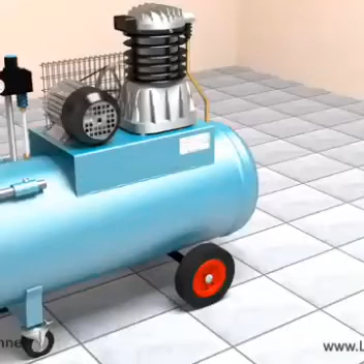This air compressor consists of an electric motor that compresses air into a storage tank. The compressed air can be released at chosen pressure when required. How does an air compressor work, and what are the criteria for selecting a proper air compressor?

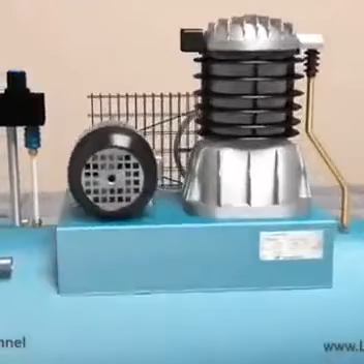Well, there exists a variety of different compressor types. Let's continue with an overview. Normally, the compressors used in the field of automation and workshops are the so-called positive displacement compressors. Here, pressure is achieved when air is drawn into a chamber and the volume of this chamber is reduced. In this video, we want to confine ourselves to this type of compressor.

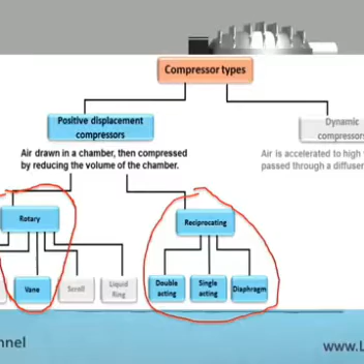Let's have a closer look at the reciprocating compressor. As the crankshaft turns, a piston reciprocates within the cylindrical housing. The inlet valve, also called suction valve, allows atmospheric air to enter the cylinder. This is done during a suction stroke of the cylinder. The outlet or discharge valve opens at high pressure during the compression stroke.

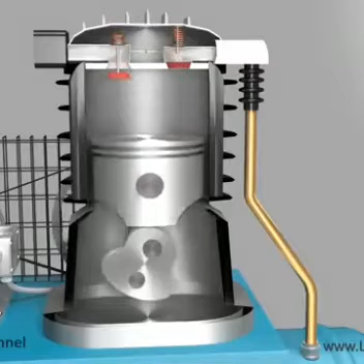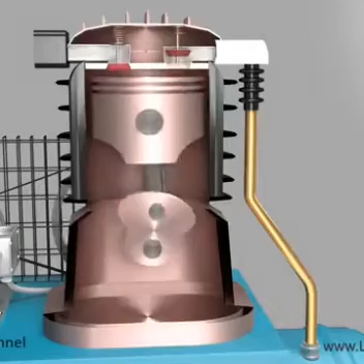Air heats up when it is compressed. This is a problem of each compressor. The result is not only a less efficient compression cycle, but also a real danger of explosion if any inflammable substances, such as oil or lubricant, get in contact with the overheated air and piston. Therefore, the compression of a single-stage compressor is limited to an output pressure of about 10 bars, or 145 psi.

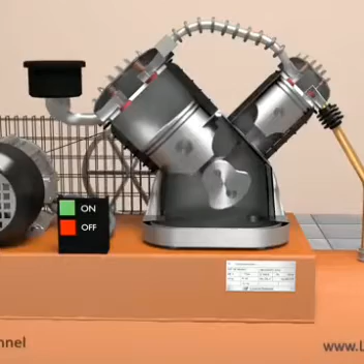To achieve higher pressures, you would use a multi-stage compressor. Here, a two-stage compressor is shown. The large piston builds the first stage. The air leaving the first stage can now be cooled before it enters the second stage. With a two-stage compressor, you achieve pressures over 20 bars, or 290 psi. Multi-stage compressors with high power can also use water cooling to avoid overheating.

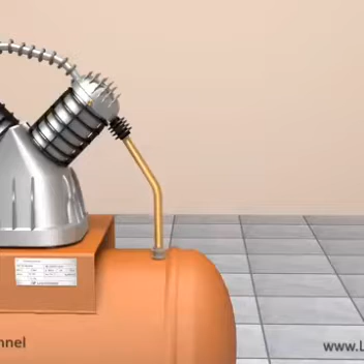Based on its working principle, the reciprocating compressor delivers only pulsed compressed air. Therefore, this type of compressor is used in conjunction with a tank. However, the use of a tank offers the advantage that the compressor can be operated with a two-point controller, resulting in less energy consumption and wear.

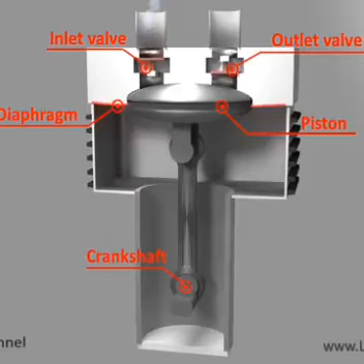The diaphragm compressor belongs to the family of piston compressors. Here, the suction chamber is sealed from the piston by a diaphragm. As an advantage, the compressed air in the compression chamber does not come in contact with the lubricated piston, and thus can be kept free of oil. The weak point of a diaphragm compressor, in general, is its membrane itself, since its elasticity is limited. You would use the diaphragm compressor, for example, in the food industry or to fill divers' bottles.

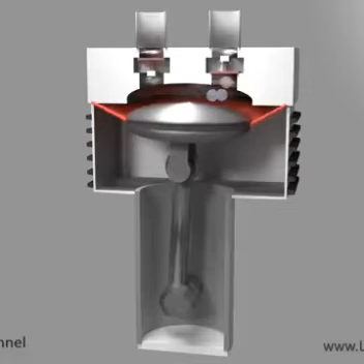A totally different working principle has the so-called rotary compressor, also named vane compressor. The typical rotary compressor has a cylindrical housing. Adjustable rotary vanes, with their center point on an offset drive shaft, have contact with the housing. So when the shaft rotates, these vanes create chambers of variable sizes. Air is sucked into the largest chamber, is compressed, and leaves the compressor at the smallest chamber.

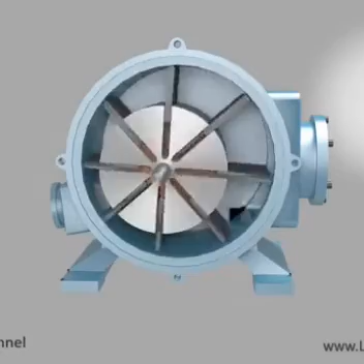The advantage here is the pulsation-free flow, in contrast to piston compressors. Therefore, an air tank may be optional. In addition, these compressors are quiet and relatively insensitive to dirt. Typical applications are, for example, wastewater treatment, fish breeding aeration, dust collection, vacuum packing, and so on.